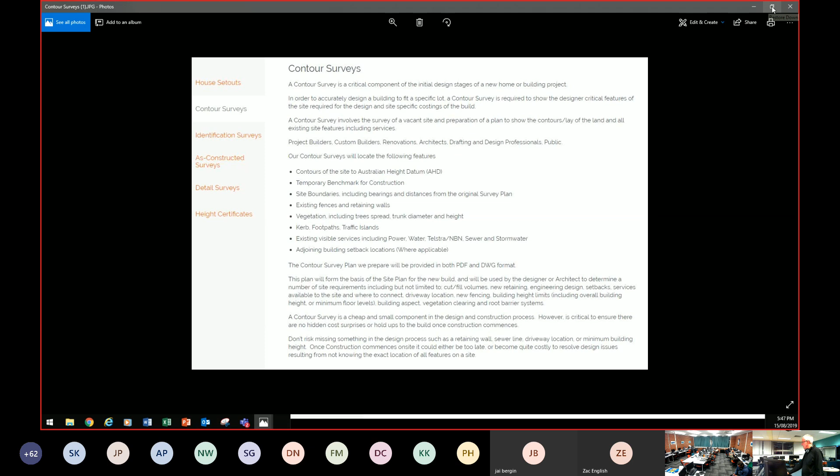We used that. We had contour heights that you did calculations for spoil, so you can see the relativity to it. So that's that one - contour surveys, detailed surveys.

I'll just go through a lot of these detailed surveys. As I said, you can log on to this site and you'll see it. It was handy just to click on each one and see exactly what it was. A detailed survey is basically a more involved contour survey plan. It outlines all the features, and goes through some other things, but I'm not going to read everything through since some of it's repetitive.

It locates - on a survey plan, you need a benchmark. Everything is relative to the benchmark on the curb and gutter, or possibly on a brick wall or a stone wall, so that you can go up and down from that. That's really important for builders and people on a construction site doing houses - a benchmark.

It's got all this which we've talked about: site boundaries, fences and walls. As I said, never ever go off a fence or a wall because they just put fences up, they don't survey where they go. Eave and ridge heights where they're applicable.

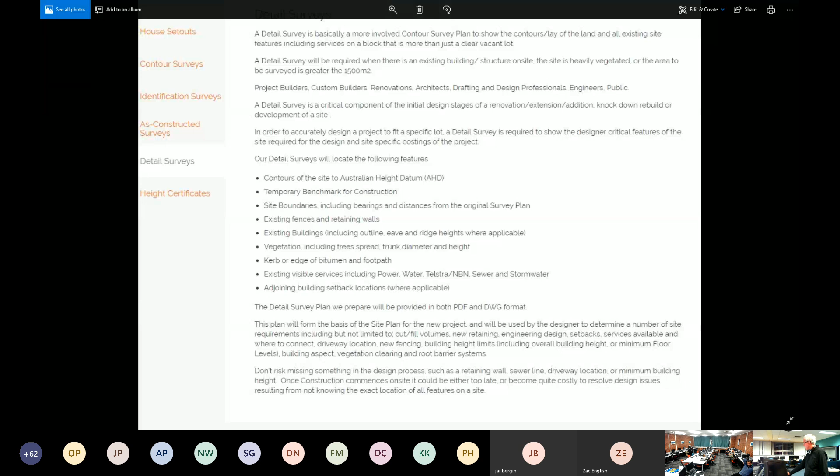Some of this is a little bit of an advertisement, but I thought it was a pretty good example. So that one there was contour plans or detailed surveys.

Height certification - now this is one that gets overlooked a lot. There's a number of height factors that need to be considered when designing and building a dwelling to ensure it complies with the site-specific height requirements.

Many councils will impose a maximum building height above natural ground level, and you can't actually build the site up so you can build higher - it goes from natural ground level. It's the certifier who will require a certificate from a licensed surveyor confirming that the new dwelling has not exceeded this limit.

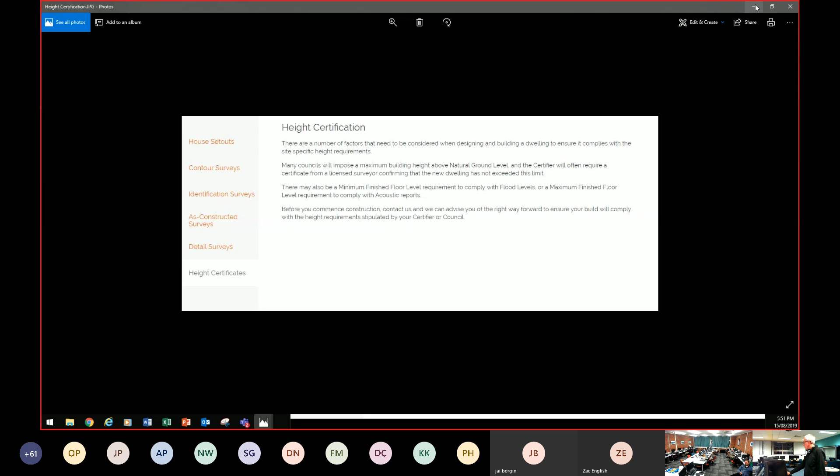There's also other things that could be required to see if they comply, like flood levels. As I said, you can read a lot of these things yourself, but this site here I found was pretty good. So that was our height certification.

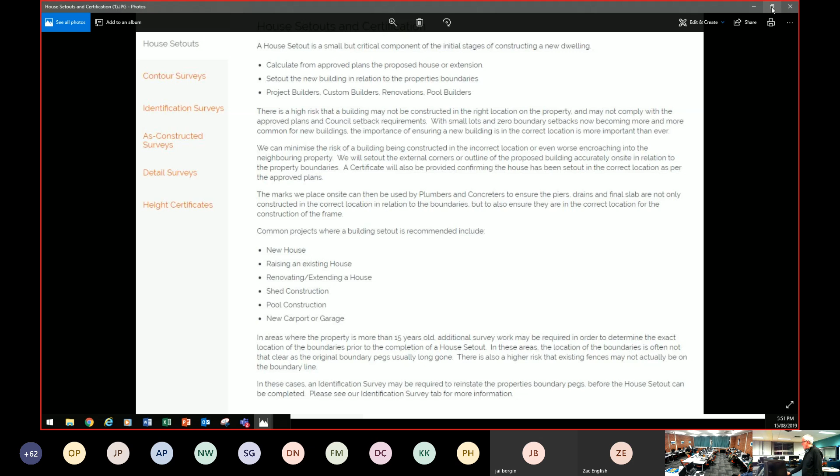House setouts certification - I'm not going to read through that one, you can see what it is. There are some exercises that refer to each one of these: house setouts, contour surveys, identification surveys, as constructed surveys, detailed surveys, and height certificates. When you start the activities, your activities will refer to each one of these.

I'll just open that one too, seeing I've opened them all - an identification survey. Investigation of encroachments, possibly replacing boundary marks. Look, you can read a lot of this yourself, and you will have to do the quiz, but it's a very good resource.

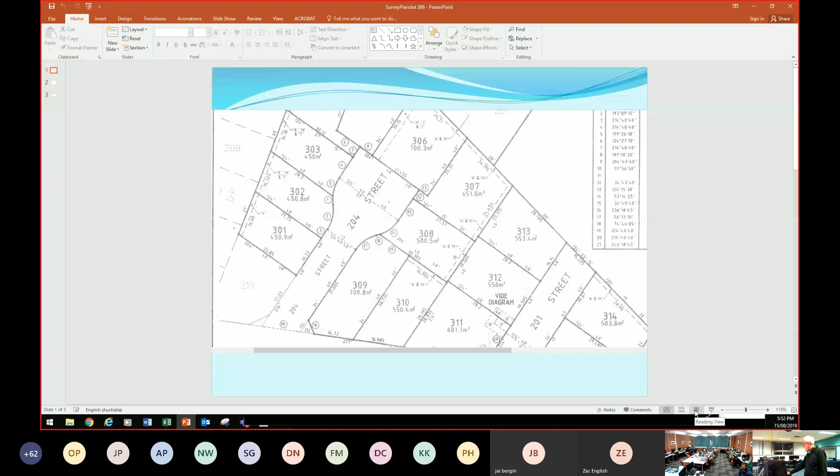Now, there's a couple of PowerPoints. I'll get through them pretty quick so you can get onto the activities. This is a subdivision plan, just a bit of an example of one. This is what you would do maybe in a new subdivision.

Over here is how they identify some of the blocks, the lots. These are the lots, the street, tells you the number of square... whoops, we don't want that, we want to zoom out.

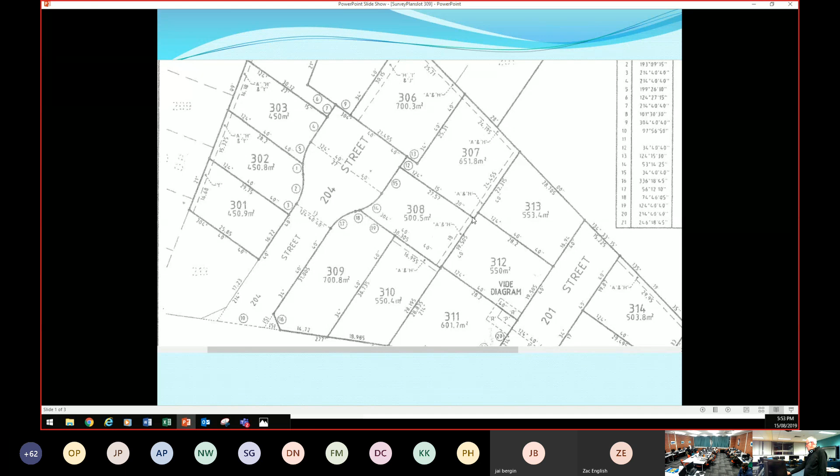There are methods within the plan to identify the easement. It's telling you the easement to drain water is 1.5 metres wide. The easement for the pad mount substation is 2.75 metres wide. There's an easement for underground cables 1 metre wide.

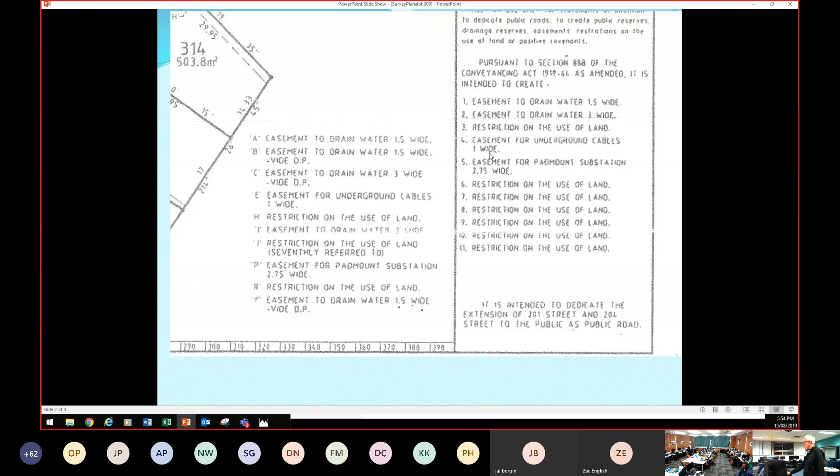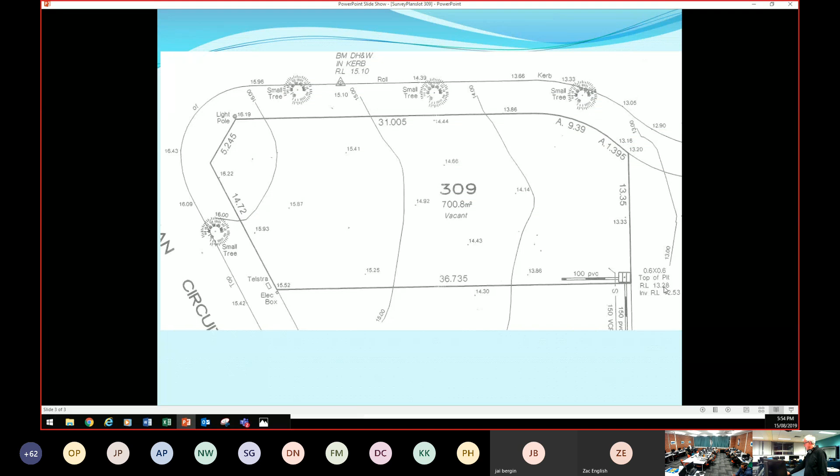There we have our trees, 700.8 square metres, and there's a pit down the back. Top of pit, RL 13.18. So that's a survey plan, and that's the sort of information you get on it.

Okay, so that's one done.

Okay, so we'll go to setting out with some star pickets. We'll make this pretty quick.

This one is from Nowra, I think. So all you people down in Nowra, you've got an honourable mention here, I think. Is that Nowra? Could you tell me if that's Nowra? Is it? Well, there you go. Sorry, Nowra, I got you all excited about a big mention there, and it's actually Wollongong.

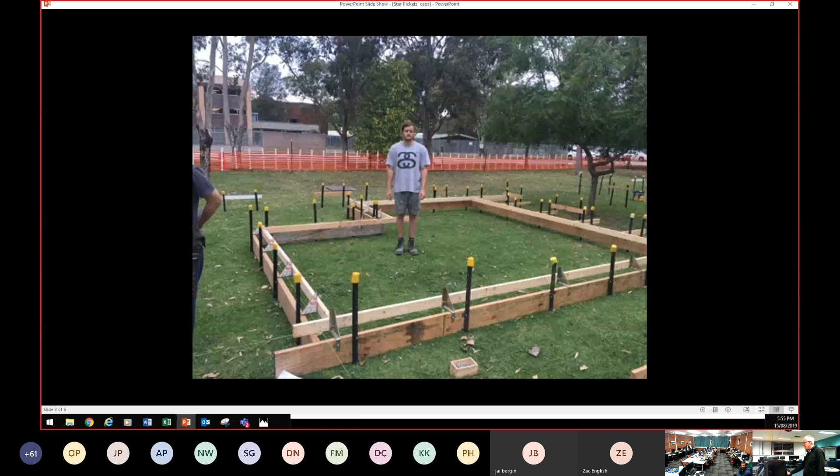This is pretty close to what you've got to do on your field day. You see these star pickets? Part of the field day assessment is safety. You can't have star pickets without caps. I understand you've got to drive the picket in before you put the cap on, but you can't have all these pickets in with no caps. So as you complete putting your picket in, put a cap on it.

Safety is part of your assessment, so just be aware of that. The other thing is don't drive the pickets too far. The pickets are probably 900 millimetres high. Don't drive them in 500 mil, because you have to get the picket out at the end of the day. Just drive it in 200 mil.

The ground is really hard, so you've got to use your judgement as to how far you drive the pickets in. But like I said, you have to get the pickets out at the end of the day, so don't muscle up and see how far you can drive them in. Sorry, I didn't finish.

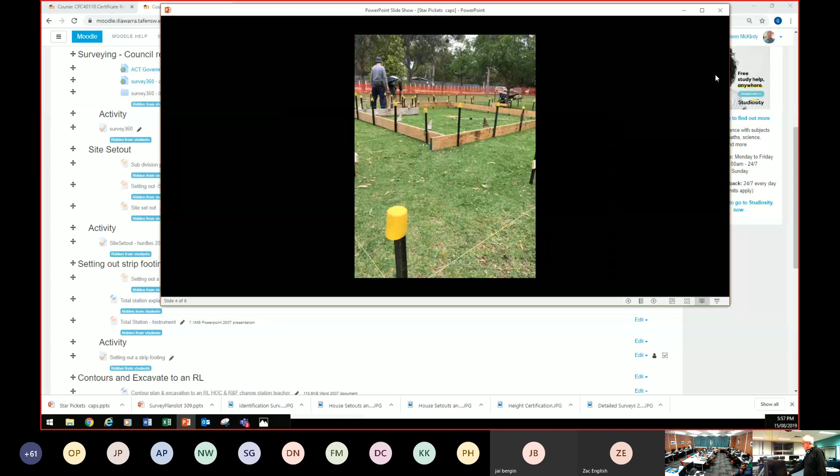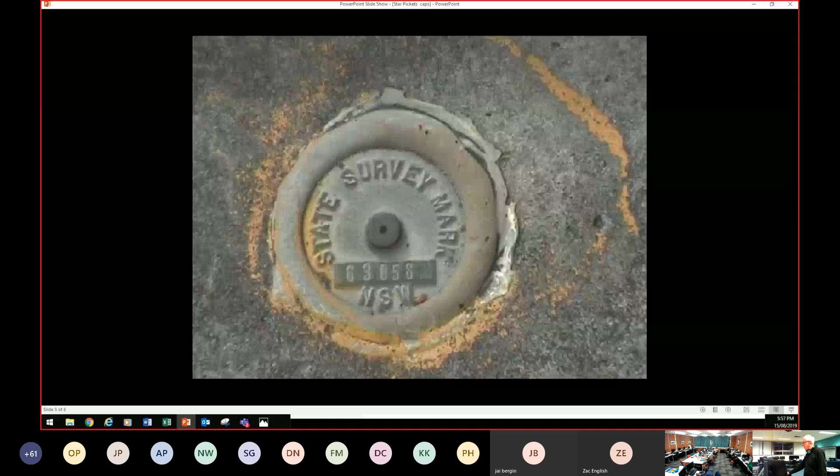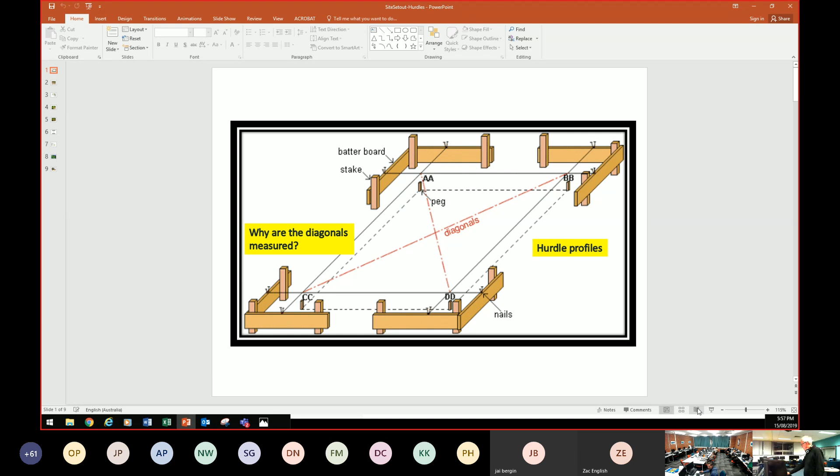This is just a little bit on site set out, and I'm not a fan of PowerPoints, but sometimes you can get a whole lot of information over in a really quick fashion. These are our hurdle profiles. Okay, there we go there.

I should have read it. A hurdle profile, I was trying to think what sort of profile it was. It's really important to get this square.

For you students, there are different ways you can start setting out. This peg may be driven in on the corner, and you might know that this has to be 2 metres away, so you can drive a peg in 2 metres away. Don't drive the peg in up here because you know that's going to throw the whole thing out of square.

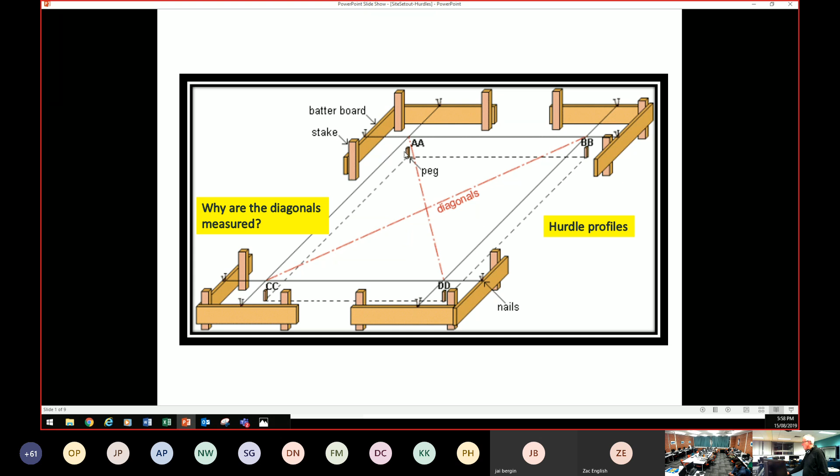Try and get it square off something. Put it 2 metres apart, put a nail in that and a nail in that, 2 metres apart. Then if this is 5 metres away, you hook your tape, or have someone holding the tape down there on the nail. You have another peg up there ready to go, and you have the other tape here. You've done the diagonal calculation, so you know exactly where that peg has to go, and you can put a nail in the top of the peg when it's exactly square because you know the diagonal.

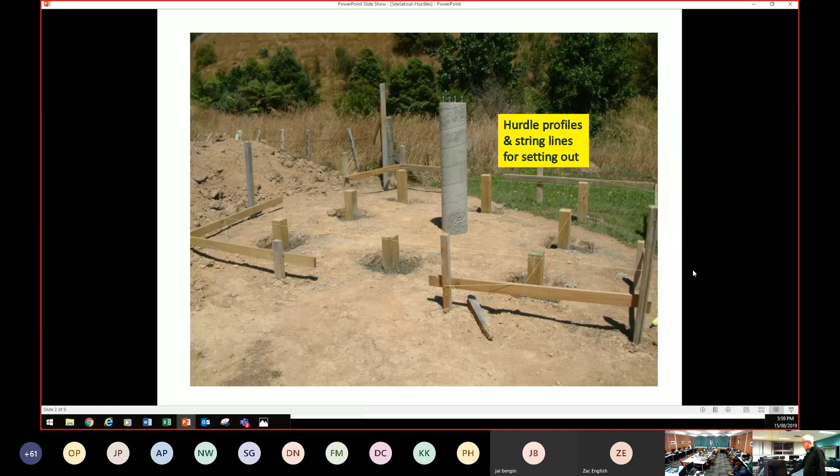I think that's okay. This is the other thing, this is how we'll be setting it out. You'll have information on the top, marks on the top saying the outside of the building.

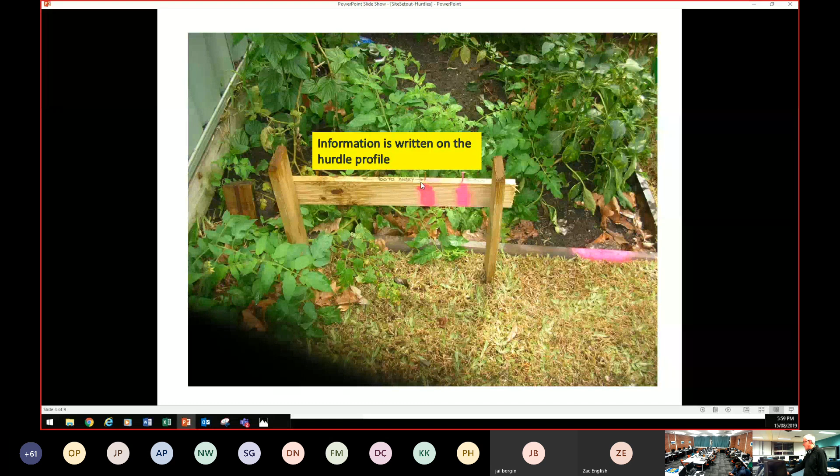We'll have star pickets. I think most of the ledgers are possibly decking, or 65 by 35 or 90 by 35. So we won't be going into plumb bobs or anything.

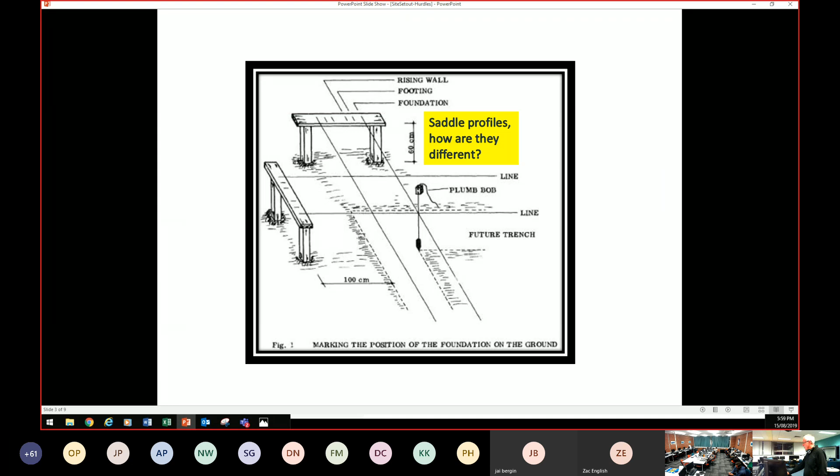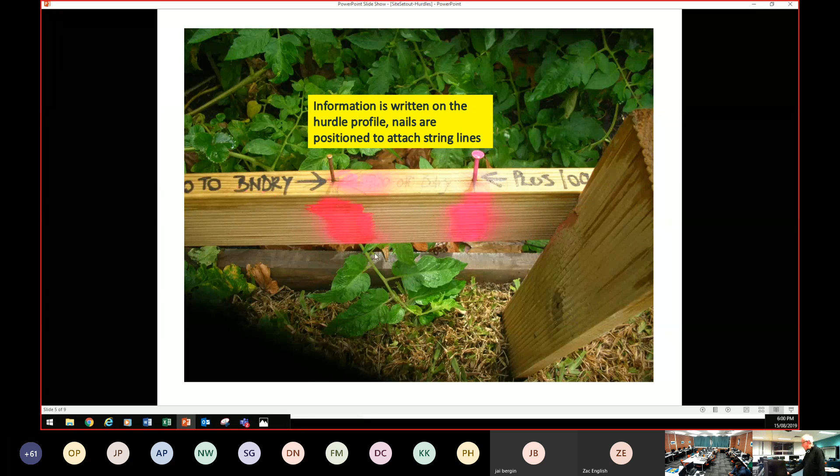Okay, this has got information. This was an actual job, and it could have said it was 1 meter to the boundary, and he's put a nail in there. There's information there, but only the person that actually filled it in would probably be able to understand exactly everything that was described on there.

Okay, this one's setting out a small deck. You've got the 3, 4, 5 method, and you can also measure a diagonal. So there are various methods that you can use.

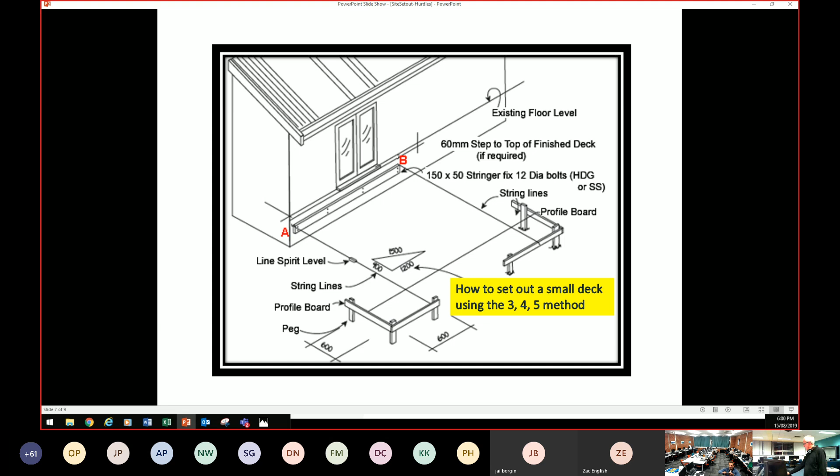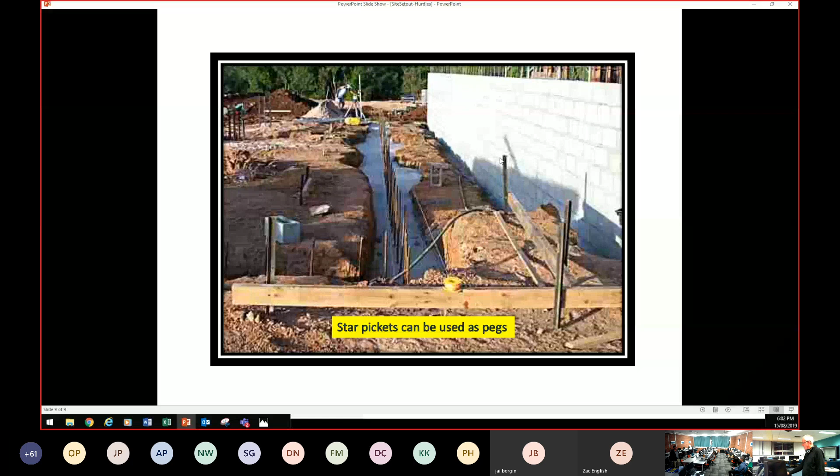Okay, and the last one is this. Now, that is what we don't do. You have to have picket caps or bar caps on top of everything. That's just dangerous, and that's exactly what we don't want. There's no, even the pickets haven't got caps on it. This was just a photo I got off the internet, but that's exactly what you don't do.

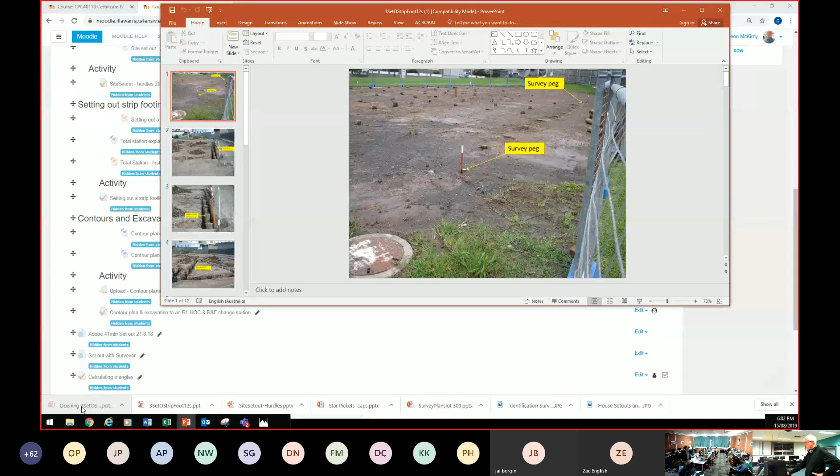So this is just setting out a strip footing. This was a really interesting job. I don't know whether anyone else has seen one like this. I have never seen one like this before.

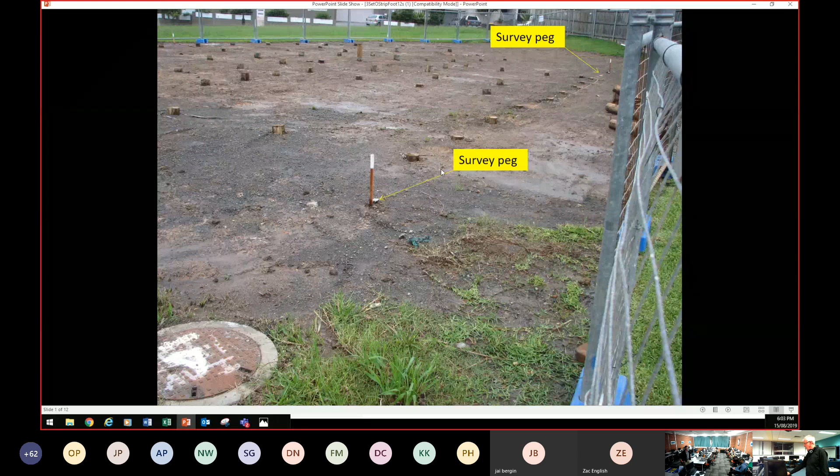What they did, they drove these, I assume they were treated pine posts. First they came and set this footing out, they set the house out. Then they had a machine, an excavator, go there, and he was driving these posts into the ground in a certain position. If you look at them, they're all in a certain position. There's a survey peg there. I was driving past this site and I was wondering what they were doing.

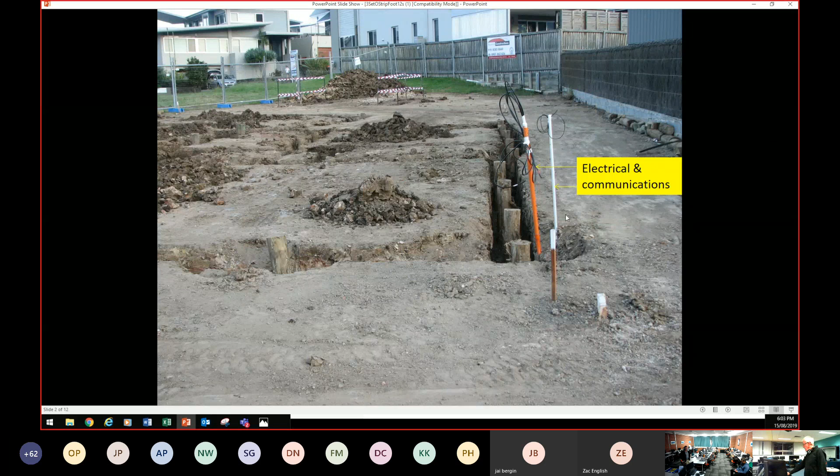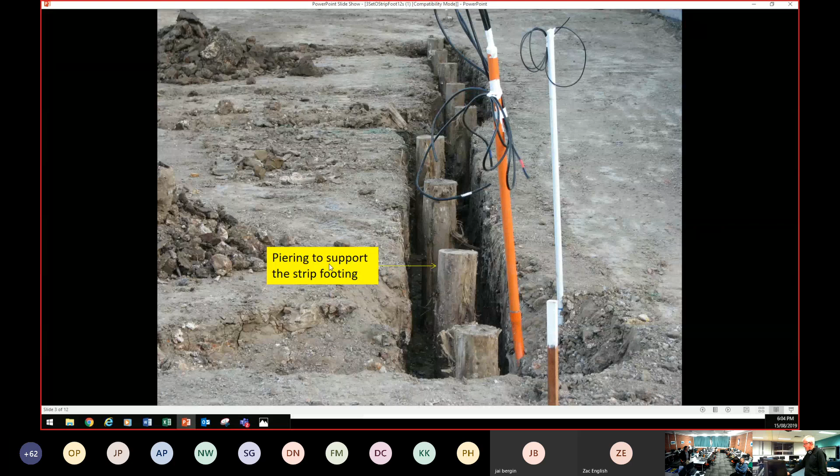So who designs the piering requirements? Well, it has to be engineered. Who set it out? Certainly a registered surveyor set it out, and then maybe a builder came in. I'm not sure, but for something like that, to have these posts driven in at the distances apart and in a straight line, I would probably be leaning towards a surveyor.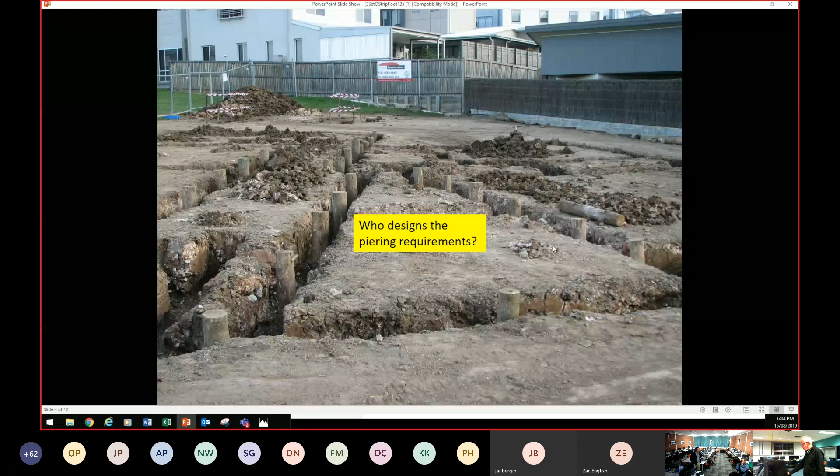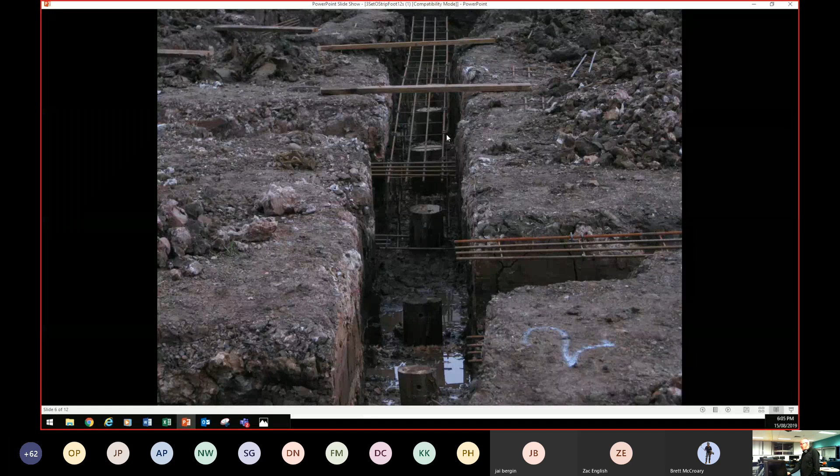Okay, one other interesting thing with this is the steel. If I can blow this up a little bit, you have a look, that's got a bit of 15 mil steel through the post. See the holes, I know it'd be really hard to see, but I'm not sure that you could. They've drilled holes through all these posts, cut them off at a certain height, and I'm not sure whether that is to tie the footing to the ground so that everything's attached. If anyone's seen any of these or participated in putting a footing down like this, it'd be interesting for you to possibly explain it a little bit more.

So, okay, you can see the steel still in there. It just goes back to a normal footing. So what this is, is just piering down.

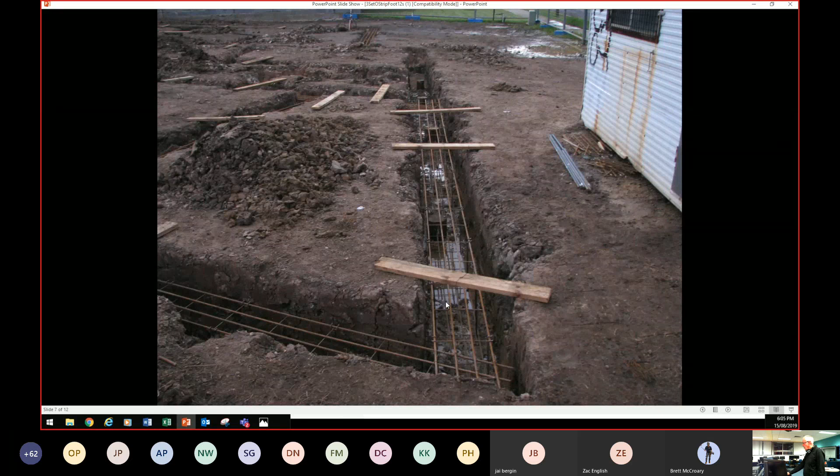Okay, there we go. And 15 bars through the top. Okay.

Yeah, I'm not sure, I've never seen it before. I couldn't ask anyone because I never saw anyone there to ask.

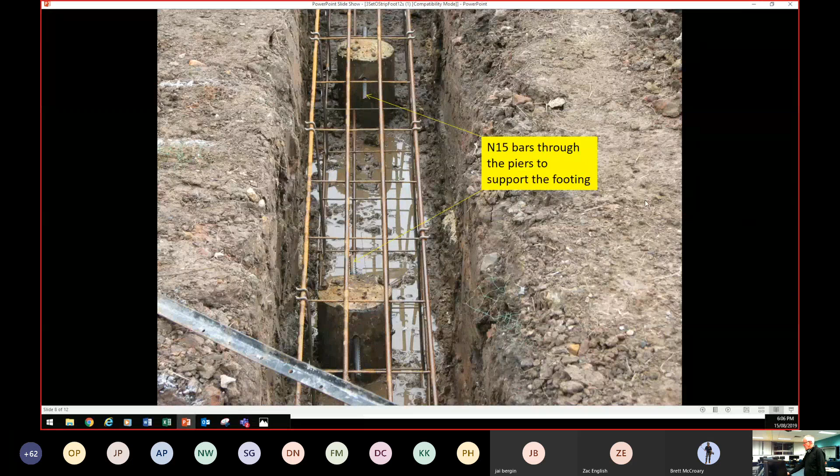But okay, this is just the lapping of steel and things, and there we have that. That's exactly what your bars should have on them, they should have bar caps. Okay, it looks nice and safe.

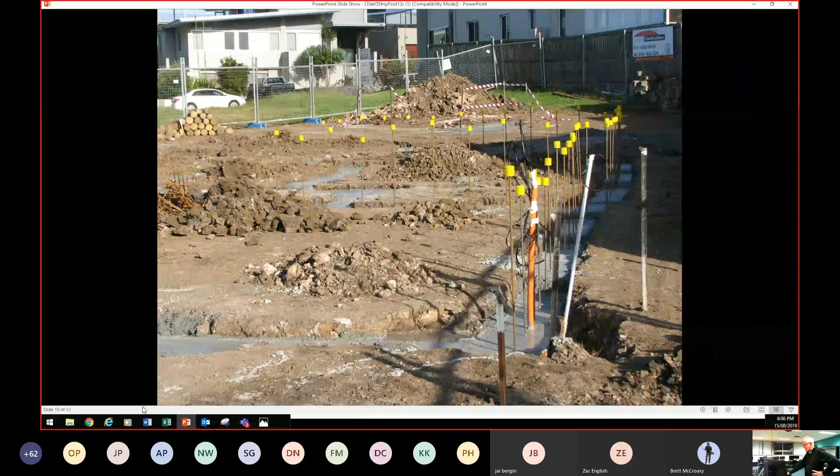So you can see that timber piering. In my experience with timber in the ground, I'd be pretty reluctant to even use treated pine. The treated pine is only treated on the outside, and if it's 100 mil in diameter, it's only treated maybe 10 or 12 mil around the outside, so the inside is still susceptible to termite damage.

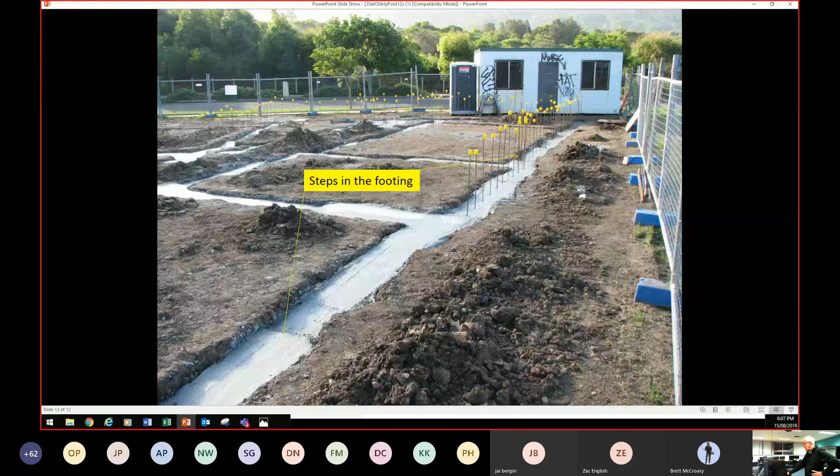Okay, so that was it, that was just an interesting job. Yeah, it is, yeah. Okay, so that was setting out a strip footing. Okay, the other night,

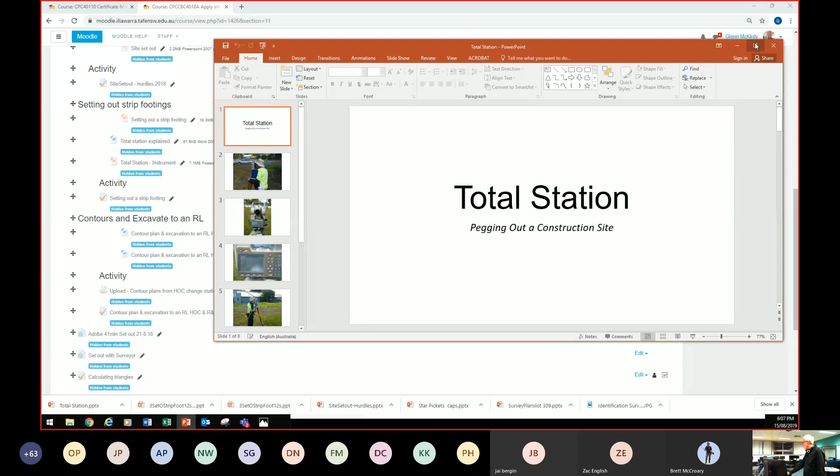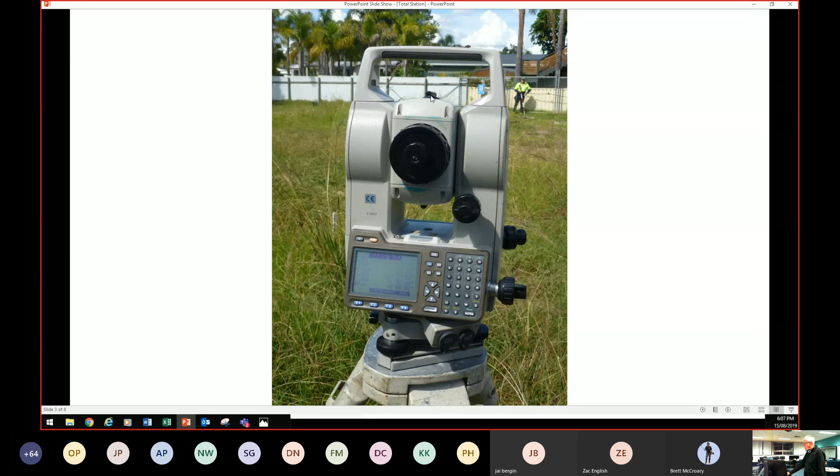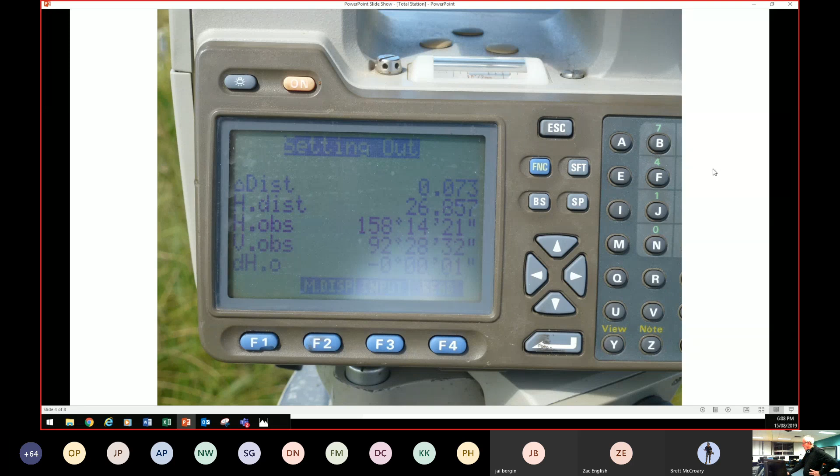Brett, for the students that didn't come in, I believe what Brett showed us - and I'd never used one either - a theodolite. This has just got a few photos. I don't think Brett's was anything as fancy as that, but this is what surveyors use. They can do the calculations on their instrument. I've never used one, I've never been with anyone that's used one, so I can't offer anything other than to say that surveyors use it and they have to be 100% correct every single time they do a calculation.

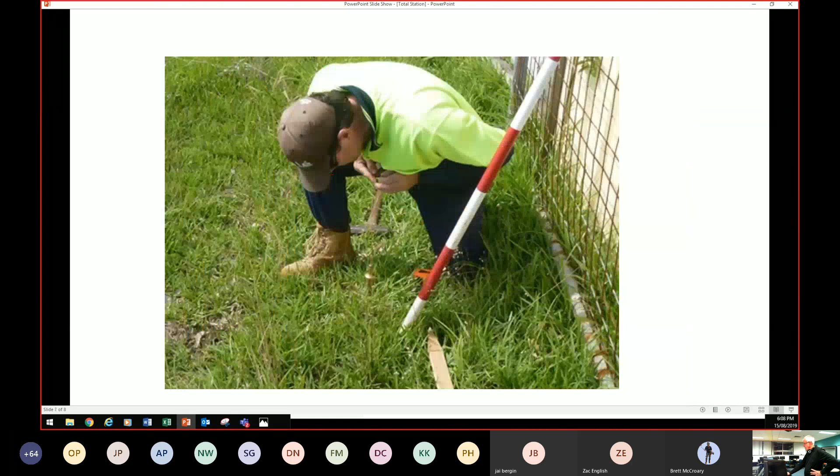But it's the same principle, you're looking at things through like a telescope. So there was only a couple with that. Okay, now that's a total station, that's what that was called.

Now, what we're going to do just briefly, I'll just open this up. Okay, now this is your exercise tonight.

Now, just with this - one of the comments we had the other night on the prac night at Wollongong was that to complete a booking sheet by hand is quite difficult. One of the reasons it's difficult is, one, where you're trying to write is outside. You're not sitting down at a desk, so you've got to compromise a little bit with the facilities that are available. Not everyone's handwriting is as good as it possibly could be.

Last year we had a couple of students come in and use their phone. They brought in a small laptop or tablet and had this set up. They had their columns laid out like this and filled it in.

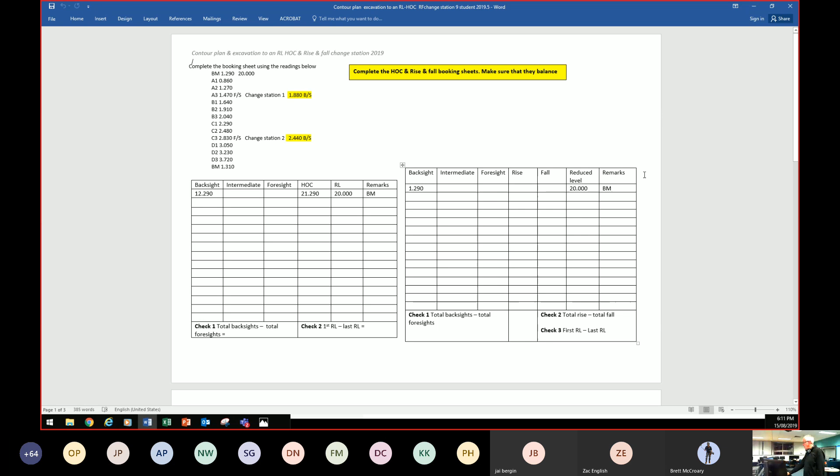Not everyone, but if you actually record all your information on your sheets to start with, and if you do it correctly, it'll be so much easier for you. You know more about the technology you would need to do that, but I'm quite sure there's apps and things you can download. All right, so that's my recommendation for you - don't leave it till the Saturday morning you're supposed to be there. Try to do it beforehand and work out a strategy that you're going to have in place.

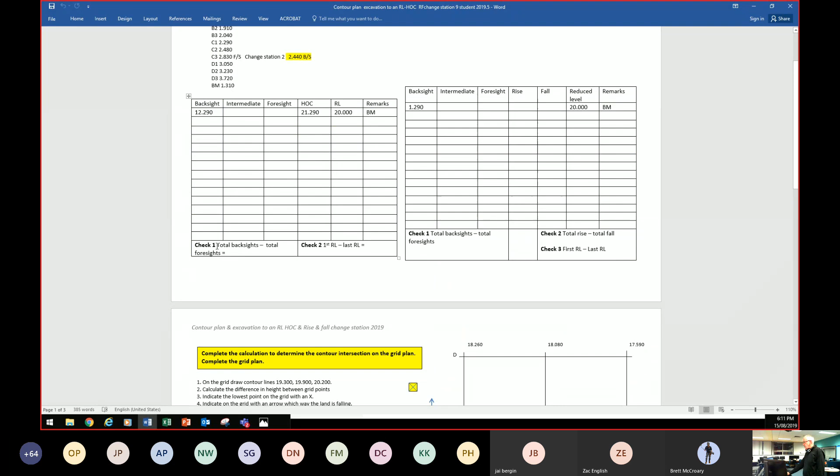All right, so the other thing with these booking sheets you're going to do tonight, do your checks. If you balance, your booking sheet's correct. If you don't balance, your booking sheet is not correct.

Now I'll go through this once more, how we actually use it, if we need to. When you do this calculation, it'll say from the highest RL. So this is C1 to D1, and the highest RL is C1. So what I would do, it's 4.78 millimeters. I'll start again, right click, go to format, go up here, and this is in centimeters. Someone was clever enough to make it 5 millimeters.

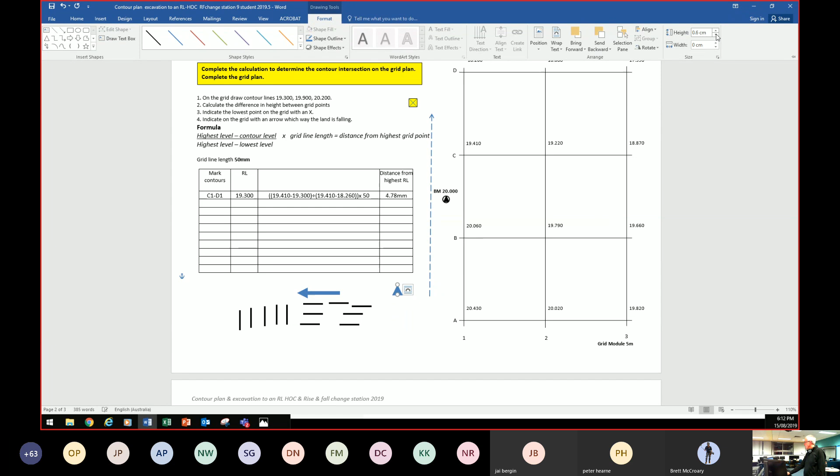Okay, this isn't an architrave, it doesn't have to be 100% fitted. So there's where it has to go. I grab one of these, right click again, drag it up there, and that's it.

I can drag - okay, see what I did there? Now that's panic station. So all I do is go back to the back button and it goes back there. Okay, so all those things happen all the time.

All right, I just thought I'd get through it. This calculation - the easiest way to do this is put your 19.3, you only need to do it once. If you look at this, 19.3 is between

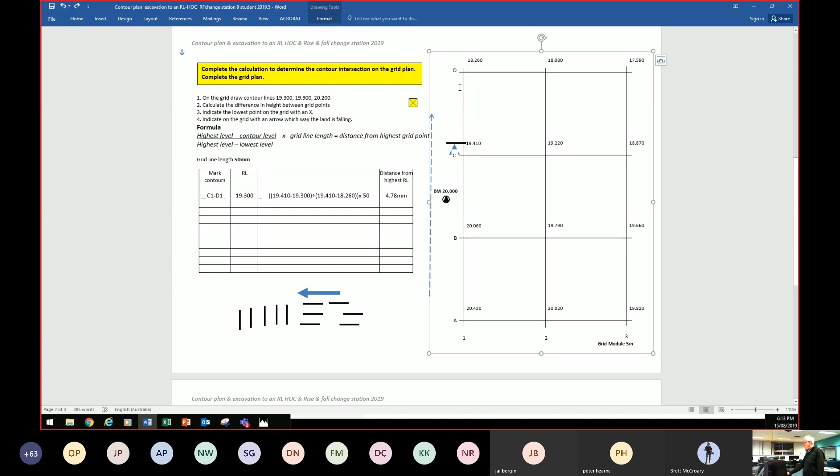D1 and C1, so there's the first one. Where else would it be between? It would be between C1 and C2, so I would put that there. What it is,

it's just trying to get in a routine. So I would write down all my contours here for 19.3. When I finished, I would then put 19.9 in.

And then I would actually mark my contours. I wouldn't do any of these calcs over here yet. I would just set up where my contours are, where my intersections are, and put my RLs in, then start over here. When all this is completed on this side, I would then move over here. There's the formula: highest RL minus contour level, divided by highest level minus lowest level, times our line length of 50.

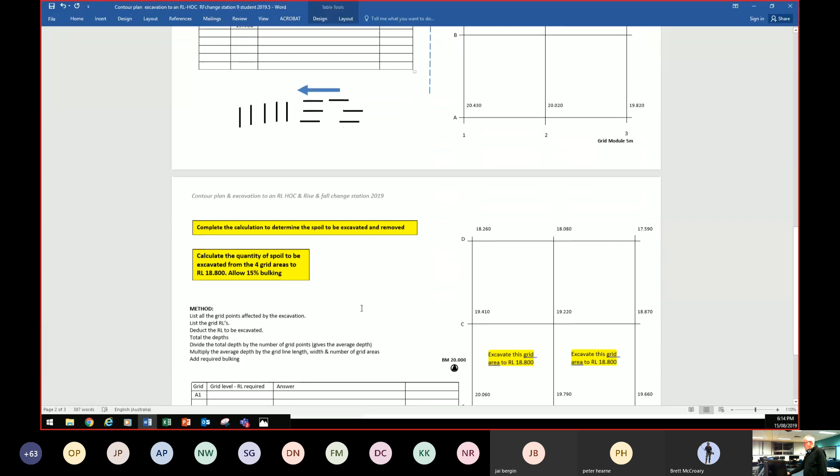Okay, so hopefully now we're doing the whole combination tonight, or you're doing the whole combination tonight. The same - one thing I didn't show you again up here is to insert.

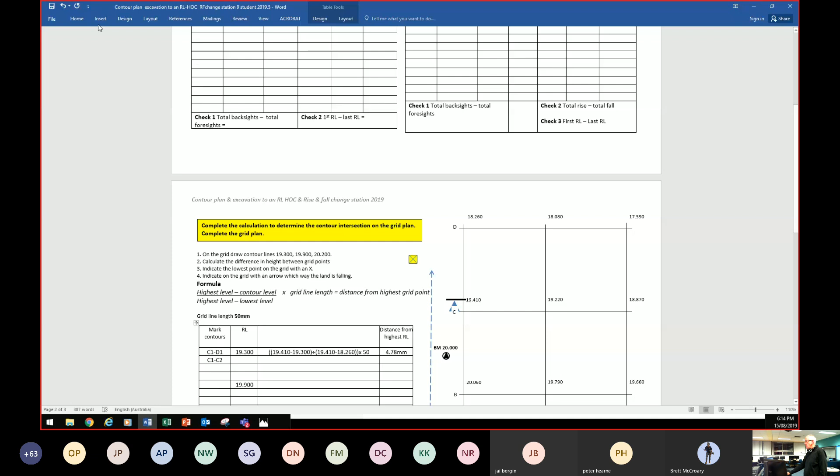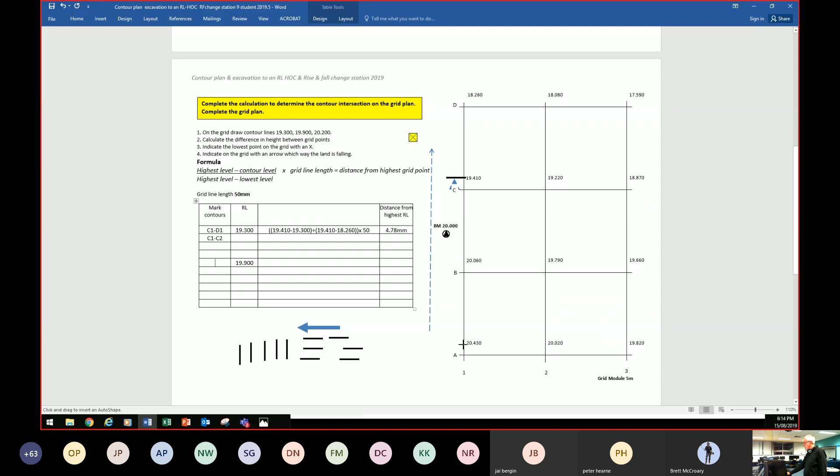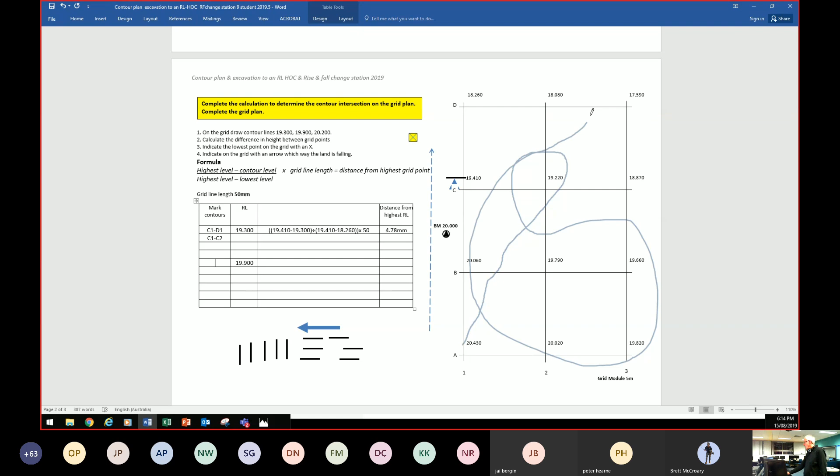When you want to insert that little wiggly line, freehand it, you grab it, and if I wanted to go from here, I move my mouse to where I need to go, left click, and hold my finger on it the whole time. If I wanted to go around in circles - as soon as I take my hand off it, it's difficult to start again. Okay, so that's that.

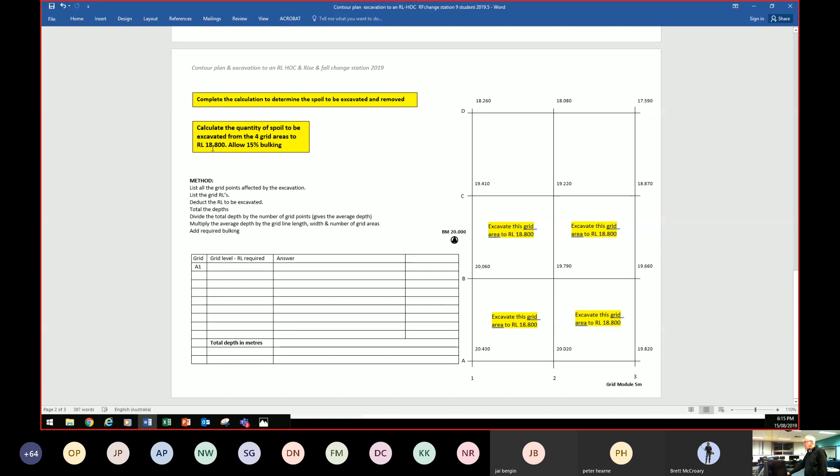Now this last one here with your spoil calculation, we read the question. We've got to go down to an RL of 18.8 and we allow 15% bulking. This has been filled out for you, so you don't even have to think about which ones are 18.8. You've got the 4 grids there.

Okay, you just follow the formula that you already have on another sheet. So you go A1, write down all the grid points down here, A2, A3. Our grid level at A1 is 20.43, and we go minus our RL required, which was 18.8. And then when we do that, we get an answer of 1.2... 1.63.

Maybe that might be the right answer. And we just go the same again - put all your grid points down here first, put all your grid levels in there, and then do your answers. You don't have to do it that way.